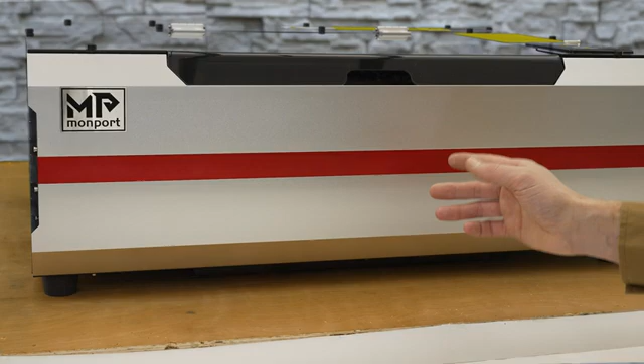I'll finish the project with a high-quality spray polyurethane, applying several coats to all surfaces of the awards. The machine I'm using is the Monport Reno 45-watt CO2 laser machine. It's fast and it's accurate.

We're now ready to jump into the computer and check out the graphics I'll be using, along with the settings for both engraving and cutting for today's project. Let's hop to it. I'll be using Lightburn software, and I'm on version 1.7.03.

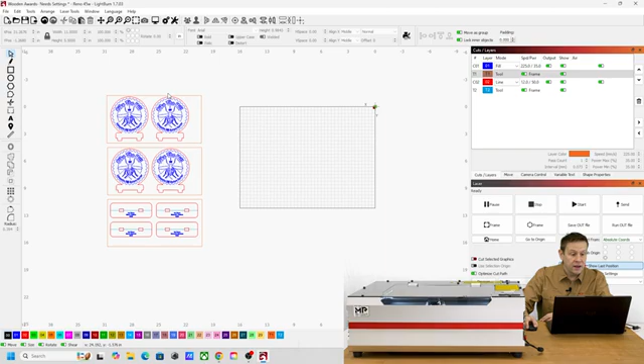Here's all my layout diagrams off to the side here, the 4 awards with the 4 base plates. We've got 2 little teeth hanging down from the awards, and that corresponds with 2 holes cut in the base plate. For that to be inserted, that's where I'll be using the 2-part epoxy.

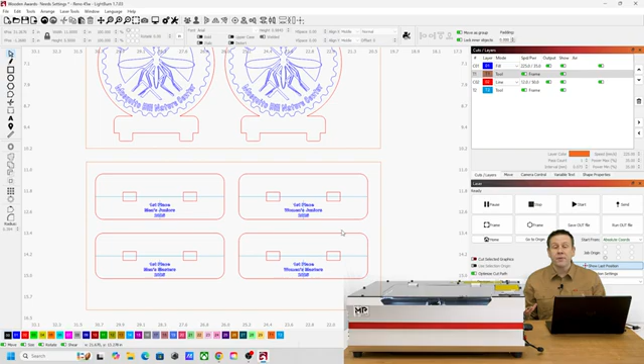Across the front of each of the base plates is going to be the name of the award for this winter fat bike race. They're only doing the first place award for each of the 4 different categories, and the graphic was supplied to me by the race committee. If you've watched this channel before, you've seen me engrave and cut this out—I was actually doing some practice cutting and engraving in those videos in preparation for making these awards.

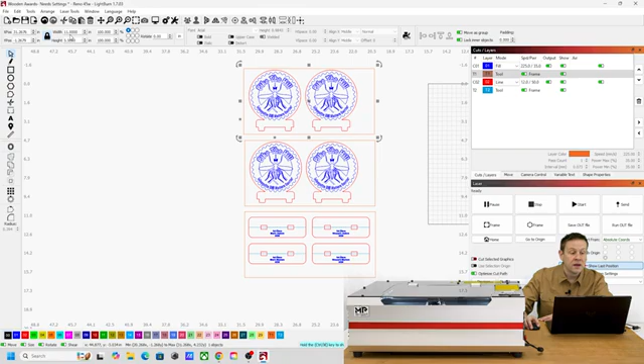The basic layout I have for this: I drew my work material on a tool layer so it won't cut or engrave, and this is that 5.5 inch width by 11 inches long. Zooming in on these bottom 2, the tooth that I cut—when I drew the width of that, I made the width of this cutout the same. The height of this box is going to be the thickness of the material, about 3/8 of an inch. It's really just that easy.

I found that I pretty much make this cutout the size of the tooth that goes into it. Different materials are going to cut a little bit differently, so I might need to shrink this down or expand that out a little. There's certainly a kerf tool within the Lightburn software, which accounts for the width of the laser cut of the machine, but that starts to get a little more complicated, and I just like to keep things simple. Because this is wood, if it's just a little too tight, I can grab some sandpaper and shave off a little of that thickness, ensuring it fits into the base plate.

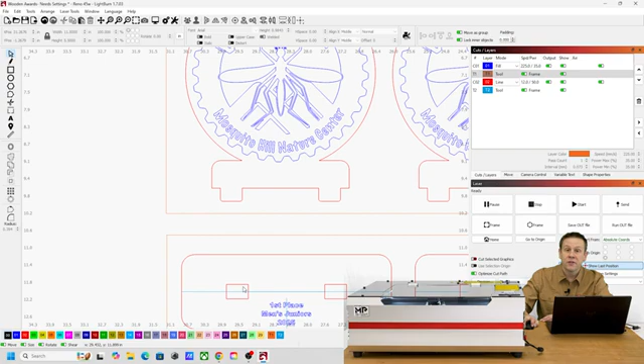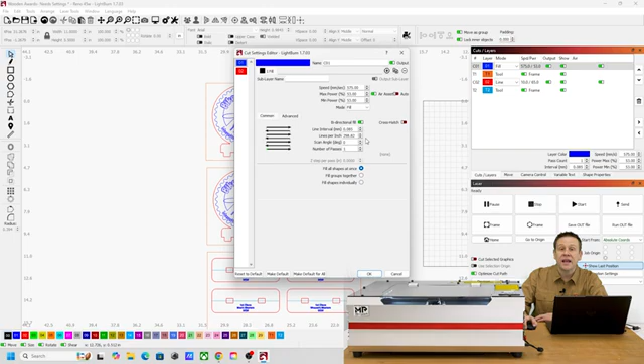Now let's take a look at the engraving and cut layer settings. I'll double click on the blue layer for my engraving: a speed of 575 millimeters per second with a power level of 53%. 1 pass is all that's needed, and my lines per inch is essentially 300. Switching over to the cutout, that's the red layer—I'll double click on that: a speed of 10 millimeters per second with a power level of 65%, and I'll be doing 2 passes for this. Yeah, I think that's everything.

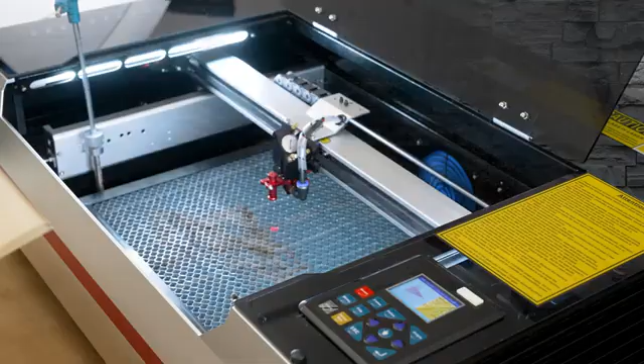I'm now ready to take the first piece of wood material, get that set up inside of the machine, and set the focus. When I load the material in, I can get that set up in there—I think that's where I'd like it to be. I'm going to take this red plunger down, and this is how I'll set the perfect focus. I've got the tool that comes with the machine that goes into this turn knob over to the side.

Now I just raise the work bed into the material until that red plunger pops all the way up. That looks good. Now I can use the keypad and manually move the laser back and forth, and I'm going to put it in this back corner and then zip it across the workpiece to make sure that it is perfectly lined up. That looks good, and I'll get that laser out of the way.

I'm going to take some red magnets now and use them to secure the work material in place. I'll put a magnet on each of the 4 sides, and of course I could fit 2 of these boards in here at the same time, but there's something really neat that I want to show you a little bit later on in the video. I'm going to move that laser head so it is back in that upper left-hand corner. Here's a close-up of what everything looks like.

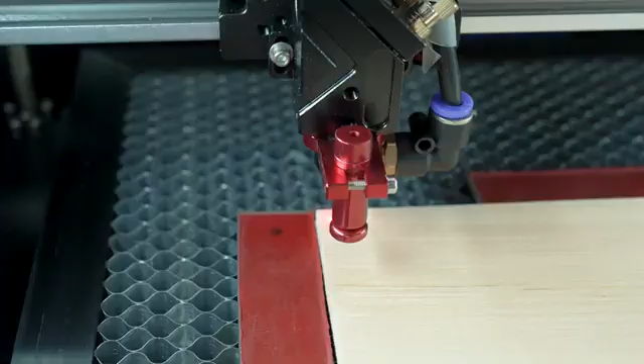The red focus assist on that laser head, I think that has to be my favorite feature on the Reno series laser machines. Now let's jump back into the Lightburn software and check out how I align my graphic up to the work material inside the machine.

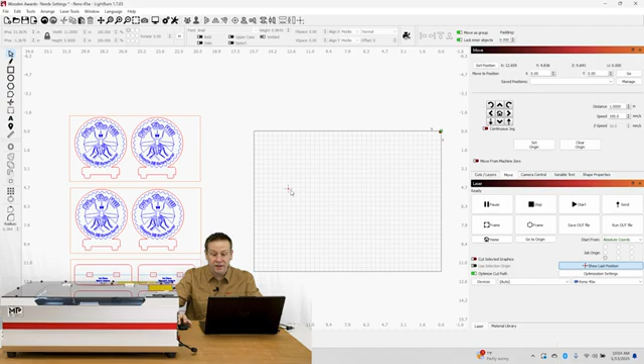As we just saw, we know that I've got the laser head positioned over the work material for the start point, and to know where that start point is in the work area, I move over to the Move tab, and I'm going to click on Get Position, and that is going to pop up a little crosshairs. That is the actual position of the laser head inside the machine. If yours doesn't show up, just click on this button here, Show Last Position, meaning the laser head.

Now I can grab this entire first graphic here, and I'll get it nestled right up to that corner. That looks good. From here, I can hit the frame button and just lean over and watch the machine and make sure that the laser head is always tracking over the material, which it is.

From here, I'm ready to tune in some nice relaxing background music. I'll get the air purifier turned on. I've already got the water chiller running, and we're ready to hit the start button.

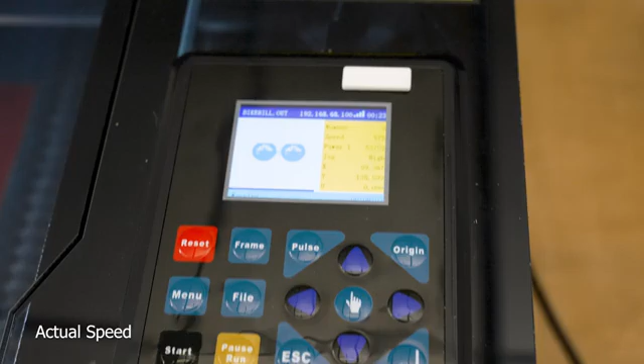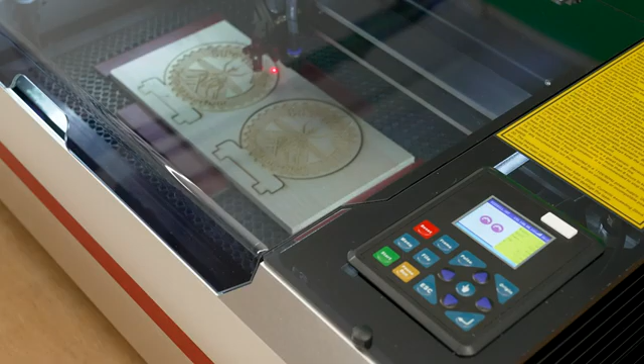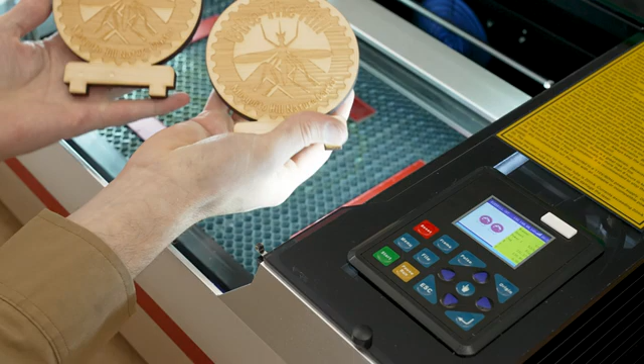The first set of 2 are complete, and let's do a quick check on these. Oh, perfectly cut out. Look at that. 2 identical, perfectly engraved wooden awards.

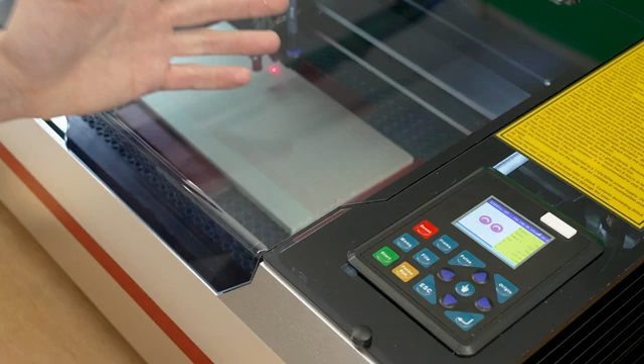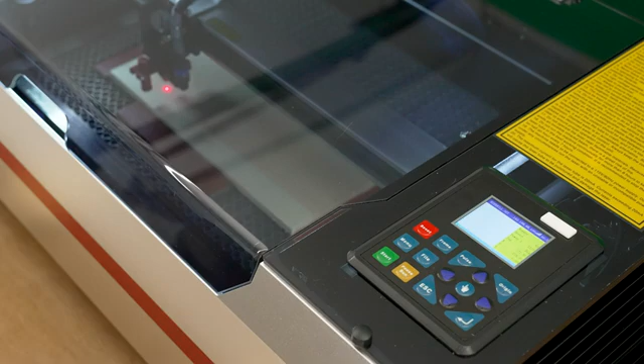Now looping back to why I was only doing 1 board at a time, and these red magnets that I have placed in there—that's because it's going to allow me to easily put the wooden blank for the next 2 awards in there. I can close the lid, and I don't have to go back to the computer and resend the same program out to the machine. That program is now stored in this controller, so to run this next set of 2, all I need to do is hit the start button, and the machine will run another 2 awards. Pretty cool.

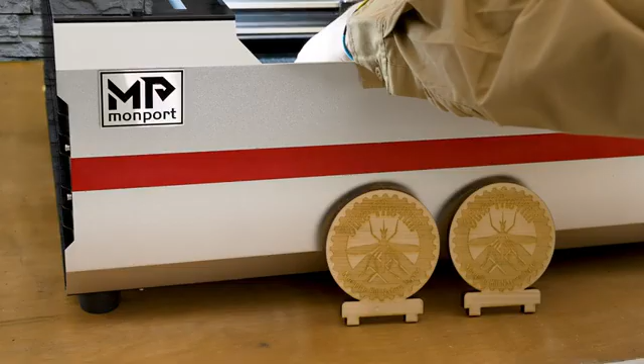Second batch is all complete, and let's check these out. This one's stuck just a tiny little bit, but we've got another 2 identical awards. Next, I'm going to load in the 3rd and final blank.

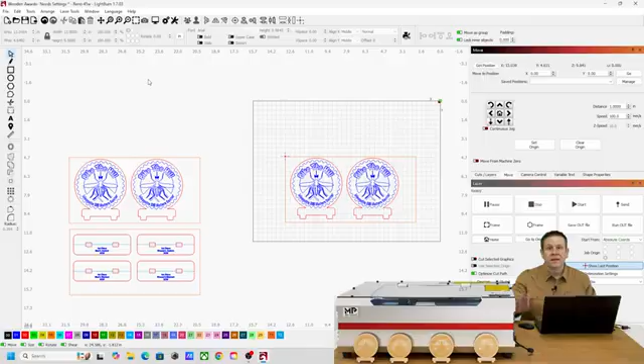We'll head back into LightBurn and check out the graphic placement for making the bases for all 4 of these awards. That 3rd and final wood blank is loaded into the machine, and now we just need to cut out a couple base plates. I'll select everything in the work area here and move it off to the side, and I'm going to grab everything for the base plates and move that into the work area.

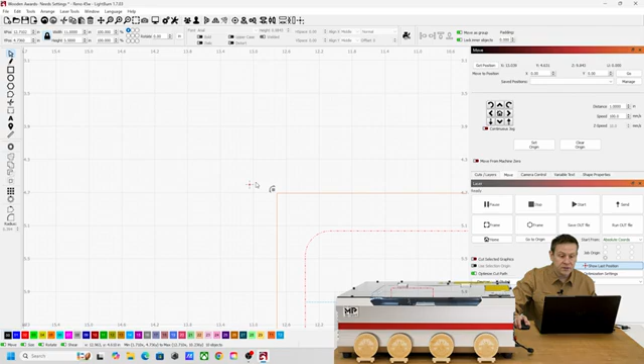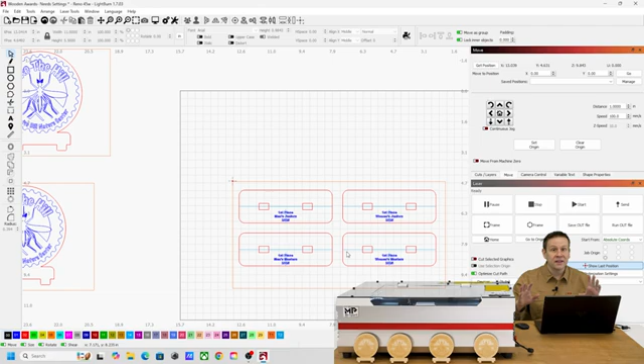I'm going to zoom in, and I have that laser position crosshair exactly on that corner of that work material. Now I can grab this whole graphic here just by the corner, and I'll put that right up to the laser head crosshairs. That is going to be plenty close enough. Now I know that the graphic is lined up to the work material inside of the machine. It's just that quick and easy.

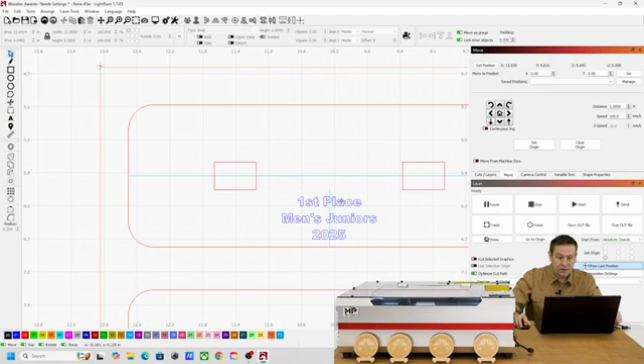When we check this out, we're going to see that I've got a couple weird extra lines in here. Of course, I've got the red cutout line, the 2 holes for the teeth of the awards, and then the engraving for the name of the award. I also have this lighter blue line going all the way across, and then a lighter blue line vertical. That is going to be the tool layer number 2.

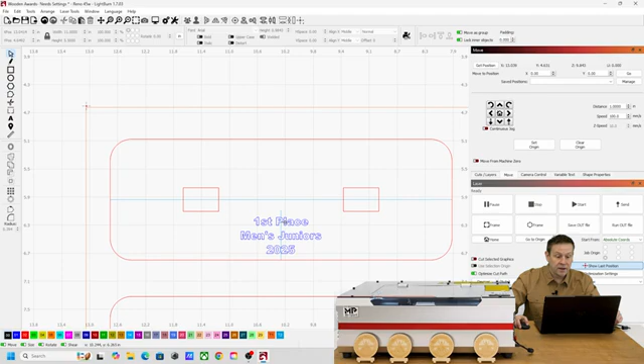Tool layers don't engrave or cut, but I use them for layouts, which is specifically what tool layers are for. I put this tool layer line across so that I had the midpoint of the height of this base, and that way I could get everything perfectly centered up. Then in between these two holes for the teeth, I drew this vertical line so that I could get the correct placement for the text so that it's on the center line of the base plate.

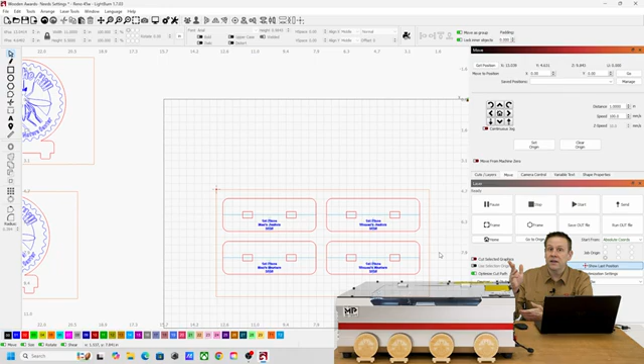Pretty straightforward, but pretty handy to use those tool layers to get correct alignment on all four of the base plates. From here, all I need to do is turn on the exhaust filter and get some nice music in the background, and we'll catch a couple screenshots or video clips of the base plates being made.

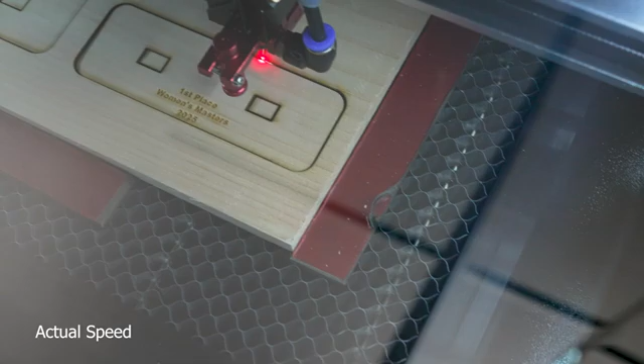All the bases are cut, and let's check those out. Everything cut out very cleanly, including all the little holes for all of the teeth. And let's see if that fits in there. I do want them snug, and wow, that is a perfect fit.

Grab this next piece. Now these were cut from the same board, so let's check out this third one real quick, because this might be a little bit different thickness, and it fits in there a little bit easier, but still nice and snug. And there's the fourth one. We've got that one in the frame as well.

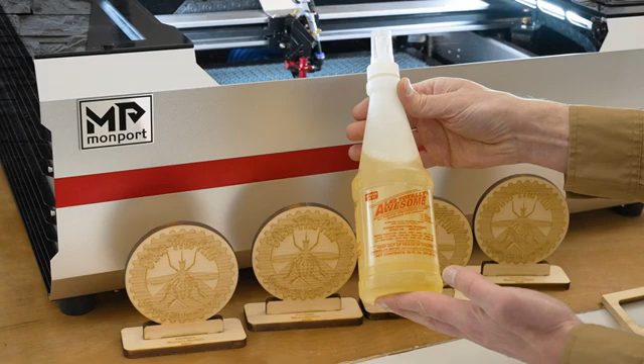Before I move to the glue up part of this project, I am going to clean up some of the smoke residue from the engraving. For that, I'm going to go to my old trusty standby, and that is some LA's Totally Awesome. I get this at the Dollar Tree, the cheapest place where I've been able to find it. And this stuff just melts away all of that smoke residue.

What I'll do is spray and saturate the entire surface, rub it with my fingers, and immediately rinse it off with some warm water, then immediately have a nice dry towel to dab all of the moisture off of the work materials. I'm going to do that off camera and allow the wood to fully dry before returning back to do the glue up.

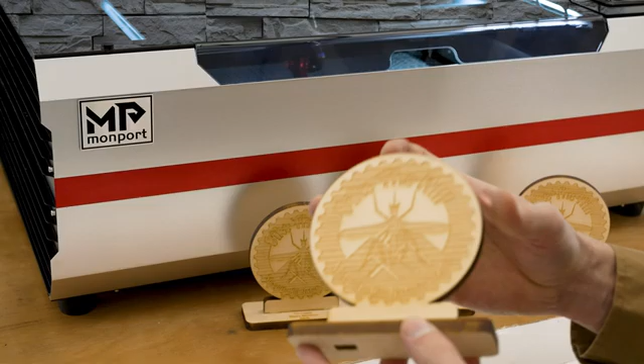Well, before I clean this up, we probably want to check these out up close. So here is the pre-assembled award without any glue on it. We take a look at this top part. I'll get this position and we can check it out. Look at all of that clean, crisp detail. Everything is exactly as it should be.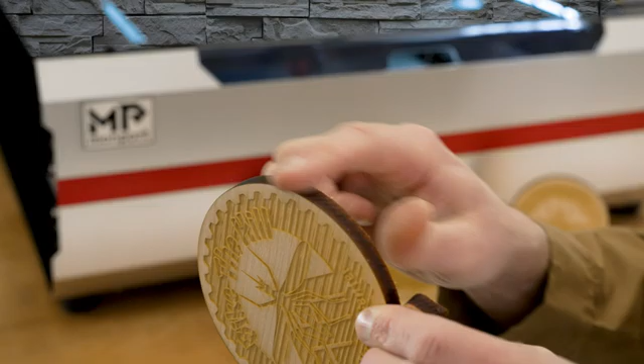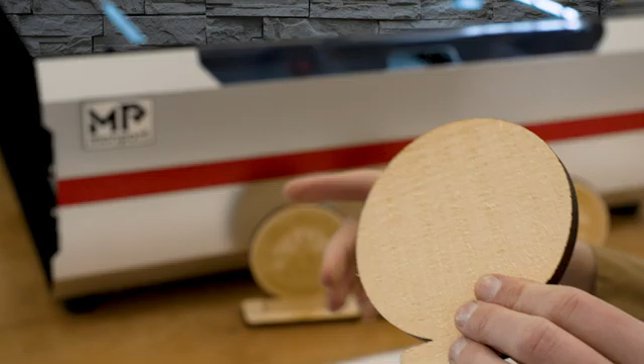I'll pull the base off and we'll check out the cut line. That's all the way around. When I rub my finger on that, there's no charring on it. So even though it's discolored a little bit, we're cutting it out with a nice laser machine, but there's no black charring on it. This all looks good, including the back side. There's no flame out, and that's due to the honeycomb that is included with the machine.

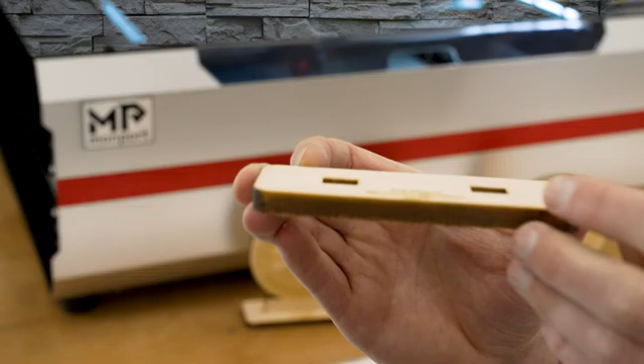We'll check out the base plate here, get that nice and close. Even though the text is nice and small, I have this clean, legible text. The rest of this looks very clean, and just like on the top part of the award, there's no charring, none of that black soot. This is all real nice, but I'm still gonna give this a wipe down so I don't have any of that smoke residue on any of these surfaces. I'll catch back up when we're ready to start the glue up of the awards.

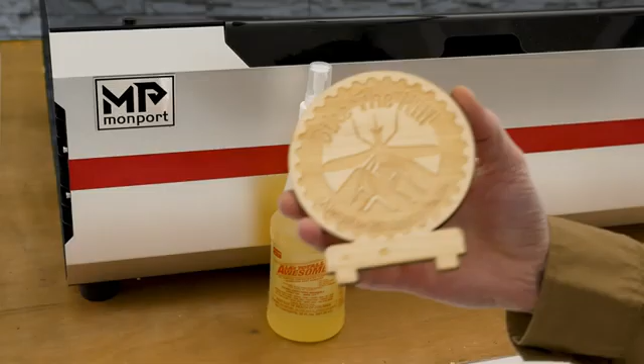The award pieces are all cleaned up and they look absolutely perfect. Next up, it's time to mix up some 5-minute epoxy and get all of these glued up.

Using the glue is pretty straightforward, but over the years I've got a couple tips I'd like to share. One is mixing the glue up on a porous surface like this cardboard really doesn't yield the best results. So for that, I like to take some packaging tape, take off a couple strips, and put that down, and that is what I'm going to use to mix up the glue on.

Once I have the two pieces glued together, to make sure the glue doesn't seep through the bottom, I'm going to pull out one more strip of tape and put that across. I'll set the pieces on top of that so they don't stick to the cardboard. That all looks good, and from here it's just business as usual with 2-part epoxy glue.

So from here I've got just a couple minutes. I'm actually going to apply the glue just on the inside of these holes. That way none of it gets on the top surface.

That looks good, and I'll just assemble this. A little bit came out of the bottom, and that's why I've got the tape there so it doesn't stick down to the cardboard. I'll just repeat this for the other 3 awards.

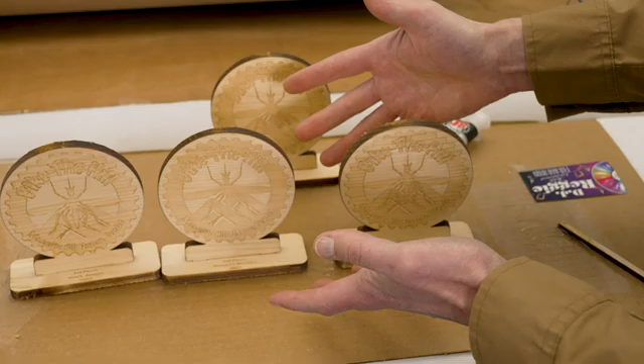The last tip that I have for the epoxy glue is related to the setup time. It initially sets, of course, in 5 minutes, just like it's advertised. However, I like to give it a full 45 minutes at least to get a nice good set on that glue before I start handling the awards.

While the glue is setting, I did think about the polyurethane spray I was going to use, but this video is being recorded in January and it's only 2 degrees outside, and when I use this stuff, I exhaust all the fumes outside, which means I'm going to pump a lot of the warm air in the shop outside, which I really don't want to do.

So instead, I'm going to use a water-based sanding sealer. Not really meant as a finish, but I think it looks great. I'll be applying 2 coats to all of the awards.

It's been a little bit of time and I had a chance to eat some lunch, and before I check the glue on the awards, I always like to check the mixing stick. That's always a good indication if the glue is set, and yep, that has definitely set.

I'll check one of these out. And I can hear that this actually stuck down. There we go, and that's why I put that tape down. Everything looks good, yep, that one stuck down. This one I already checked, and the back one. Yep.

Everything looks good, and I also mixed up the sanding sealer, and I can take some brushes and apply a couple coats to this first piece, and I'll show you what it looks like with the sanding sealer on next to one that has not been coated. So I'll catch up with you in a few minutes.

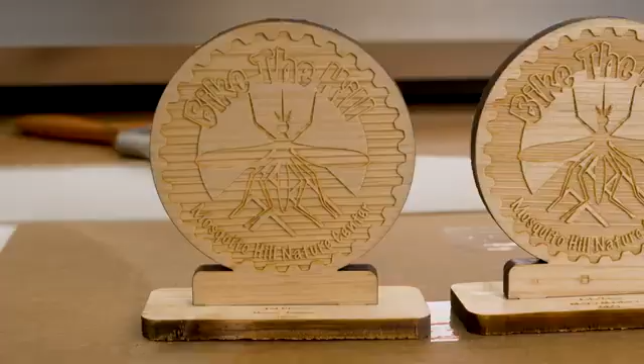This award doesn't have any of the sanding sealer on it. When we take a look at the one next to it, this has 2 coats on it, and both of them side by side, we can clearly see the one with the sanding sealer, that wood grain pops out quite a bit more.

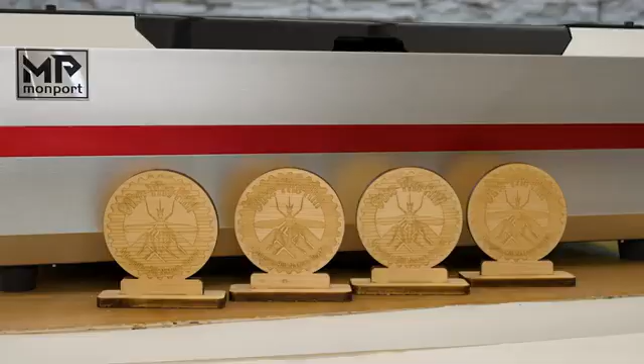All the awards are complete and they look absolutely phenomenal. Let's check out this first one so we can check out all of the amazing detail.

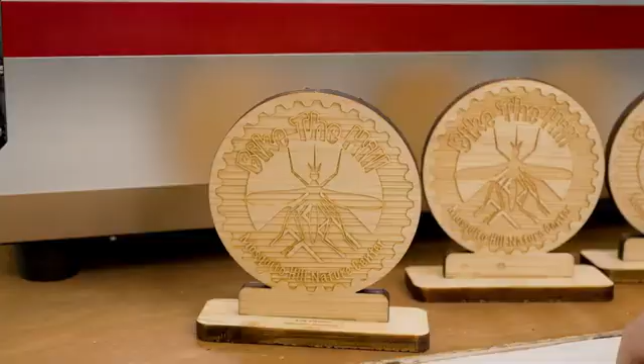Well, I certainly hope that the camera is able to pick up all the detail on this award because it's really amazing. Around the outside perimeter, I have the engraving reveals all of this nice wood grain underneath. Across the bottom, I have solid filled in letters, and I have all of the detail that I need.

Across the top, I have outlines of letters, which sometimes can be hard for a laser machine, but the Reno 45 had no problems. The last thing I want to check out is the graphic in the center, specifically the antenna on this mosquito. Fuzzy little antennas, and I've got all of the detail captured with the laser engraving, all while being able to cut through some 3/8 solid pine board.

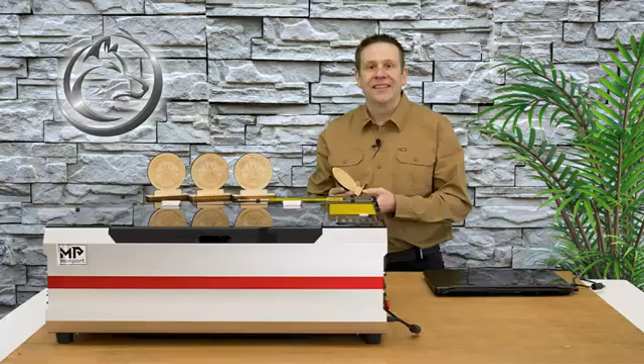Making these projects was a blast, and I hope that you enjoyed it too and kind of learned some tips and tricks along the way, along with being able to check out the Reno Pro 45.